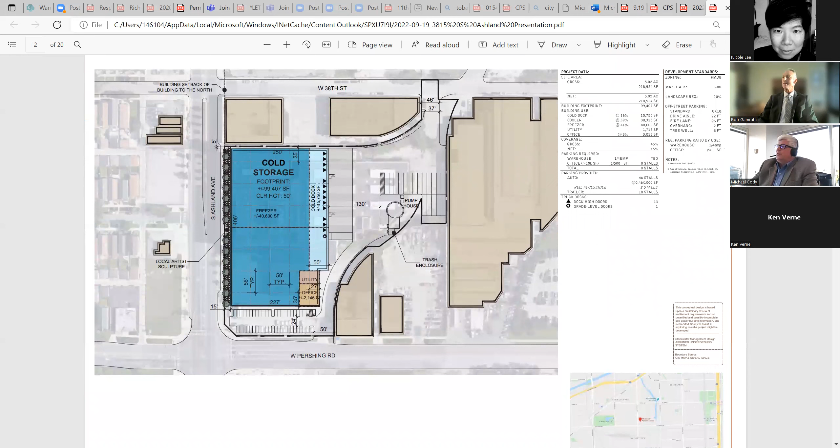So this is where we currently stand. The facility consists of a cold dock, a refrigerated dock, so trucks can provide both shipping and receiving of cold material, whether that's frozen steaks or whatever, which then goes into and out of the freezer or cooler facility. It's designed to be multi-temp, meaning we can control the temperature and create different environments for different users. There's also a small utility portion, since the utilities in a building like this are unique and need a little room, and a very small office component of about 2,100 square feet.

The site will also separate the truck circulation and the car traffic. We've gone to some great lengths to set the building back from Ashland, providing a 15-foot setback. We originally started at a 0 lot line, which is permissible and common for other buildings in the neighborhood, but because of the bus stop and pedestrian traffic on Ashland, we coordinated with the city to provide the 15-foot setback. We're also providing an artist sculpture area to help complement the building. We have some trailer storage at the rear of the site.

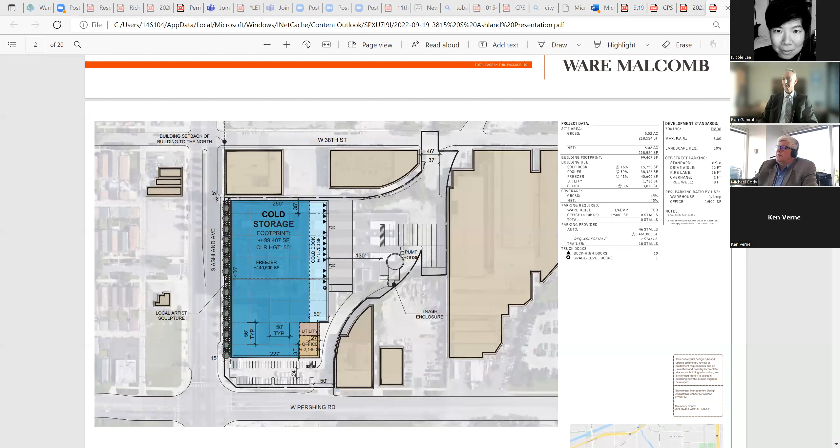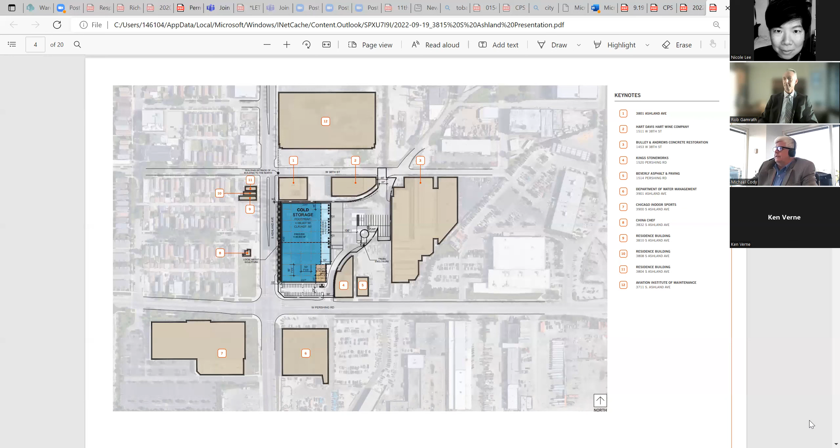If you could advance to the next slide, that would be helpful. We're showing some of the contextual neighbor buildings in context to our site. We highlighted the different facilities here—we can go back to the slide as needed, but we're putting our site in context of the others. The next slide shows the zoning.

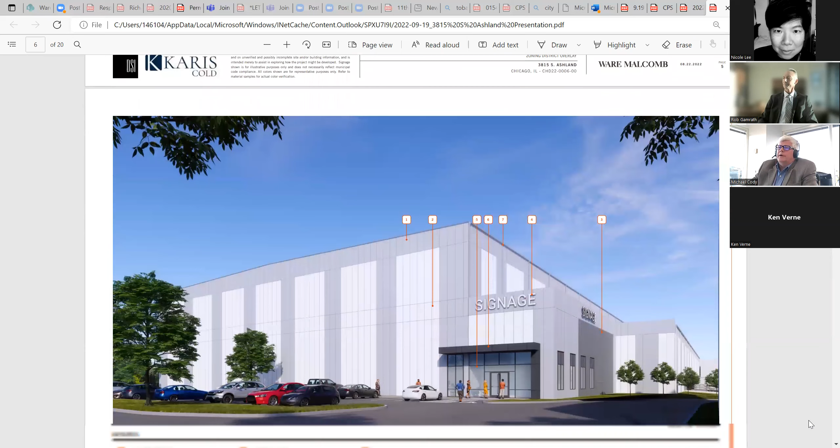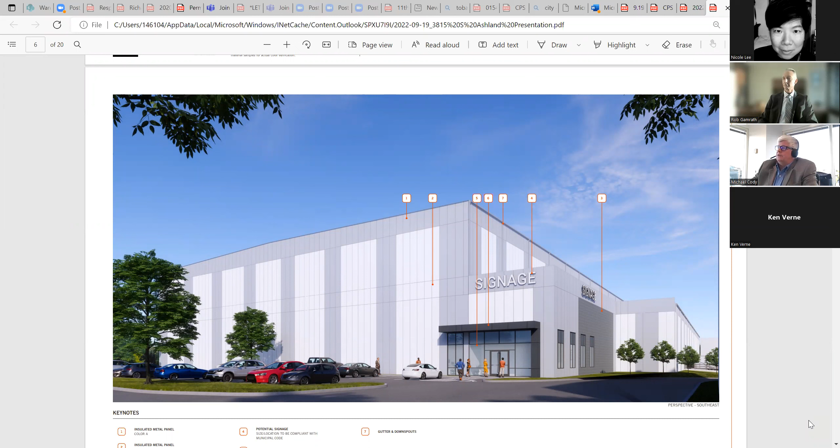And then we start getting into the building architecture. Cold storage facilities require a certain type of material and colorization in order to maintain the warranties. You can imagine the temperature change—you don't want to make a black box, because it would gain all the heat and wouldn't be conducive for the cold environment we're creating inside.

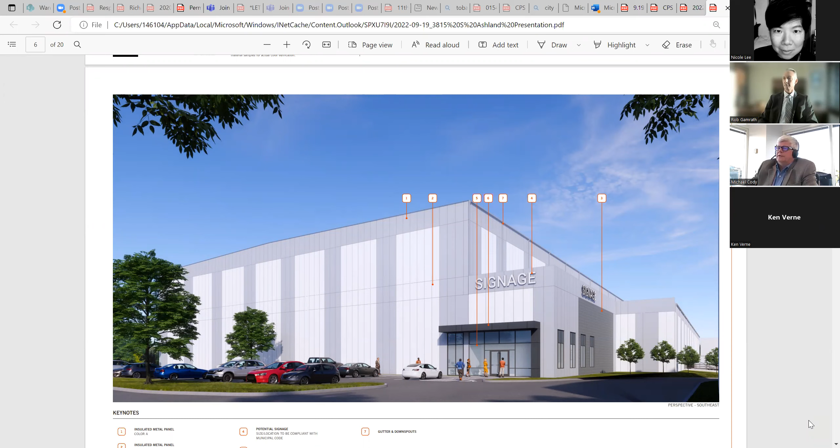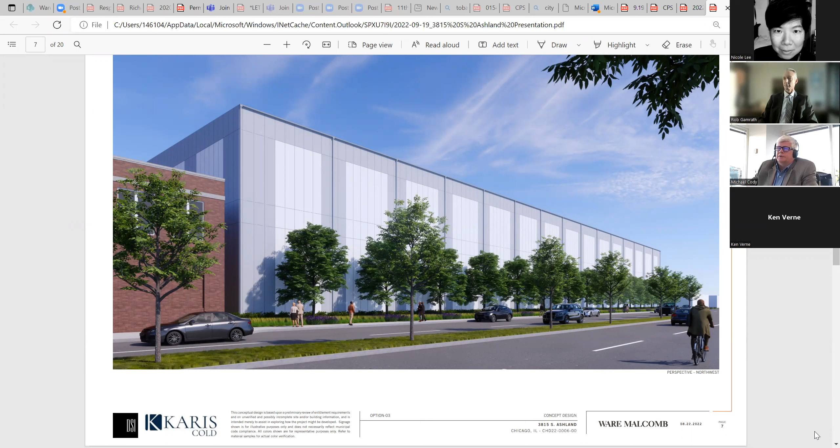If you could advance to the next slide, this is a view showing the office corner, and this is a view along the Ashland Avenue side. We tried to give it some contextual relationship to the neighborhood, tried to break up the long sea of white panels with a little bit of colorization. You can also see the downspouts coming down the side of the building, since those are external when you're in a cold storage environment.

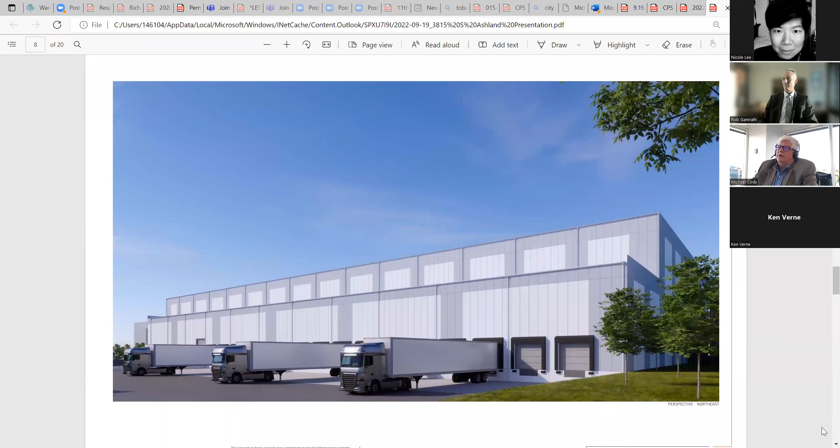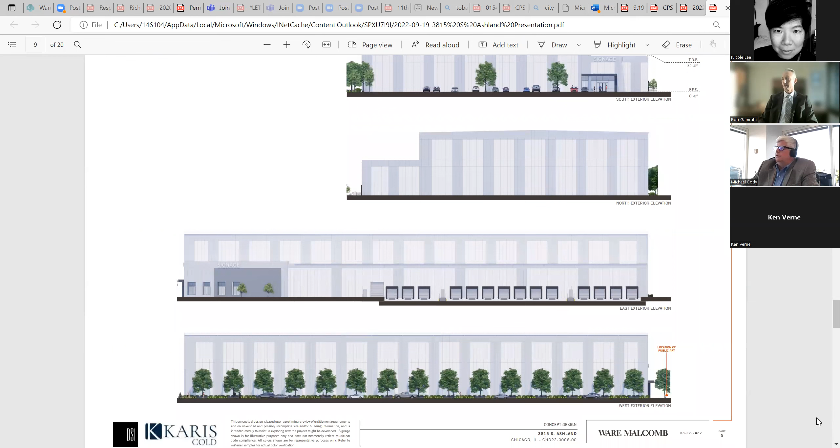Then, if you could go to the next slide—I feel like I'm talking way too much—this is a loading dock view of the building, showing how the trucks would facilitate storage and circulation of goods. Then these are just the flat, boring elevations, but they show the building. I think the renderings do a little more justice to it.

Is that good, Bob? Did I miss anything? Yeah, no, I think that's great.

As Mike pointed out, a lot of thought was given to the orientation of the building, and the most active portions of this facility have been aligned to face other commercial and industrial uses. An effort was made to keep the Ashland Avenue side, still a commercial corridor, more active, while as you progress further west into the neighborhood and residential uses, that activity has been de-emphasized. There will be a lot of landscaping—it will be one of the only buildings with a setback in this corridor, and will be heavily landscaped. These design decisions were made to make this facility an asset to the community and to mitigate impacts that otherwise would have occurred had the truck docks faced Ashland or moved traffic off of Ashland, which have now been mitigated.

We also tried to create a queuing environment for the trucks in the neighborhood. There are a lot of trucks that, hate to say it, queue in the public way, waiting for another truck to finish its circulation. We tried to create that environment within our property lines, which is a more effective tool for mitigating truck traffic in the neighborhood.

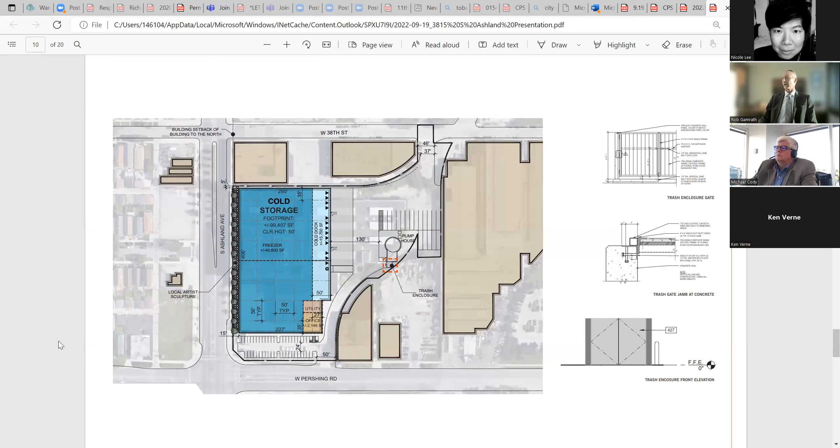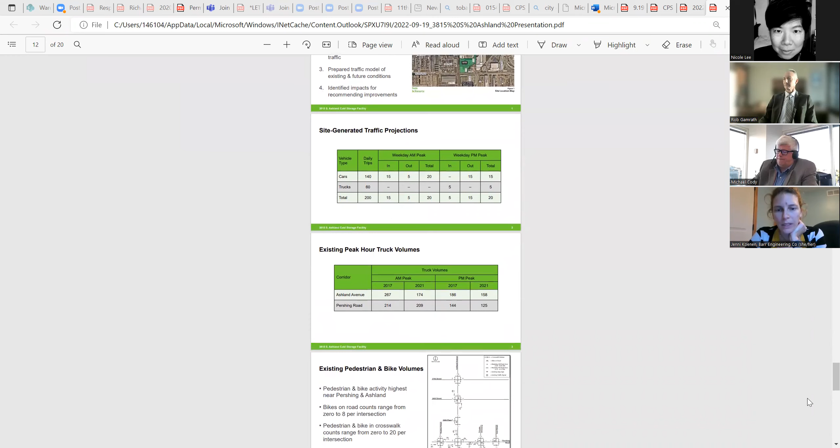Jenny, do you want to transition now to talk at a high level, or refresh folks' recollection on the air quality study that you performed and what you found through your efforts? Yeah, that would be fine. I think my stuff comes after the traffic study in the PDF, so it's probably a couple slides right there where the photo is.

Good evening, everybody. My name is Jenni Koenen. I'm a senior environmental scientist with Barr Engineering Company, and I prepared the air quality modeling report for the project, which involved modeling of 3 different pollutants as required by the new guidance and municipal requirements for projects such as this. We evaluated NOx, PM10, and PM2.5 from both the stationary and mobile sources from this project. The column on the right shows the different pollutants and standards we evaluated, and the project's modeled impacts were below all of the significant impact levels that would dictate a further refined modeling approach for the area.

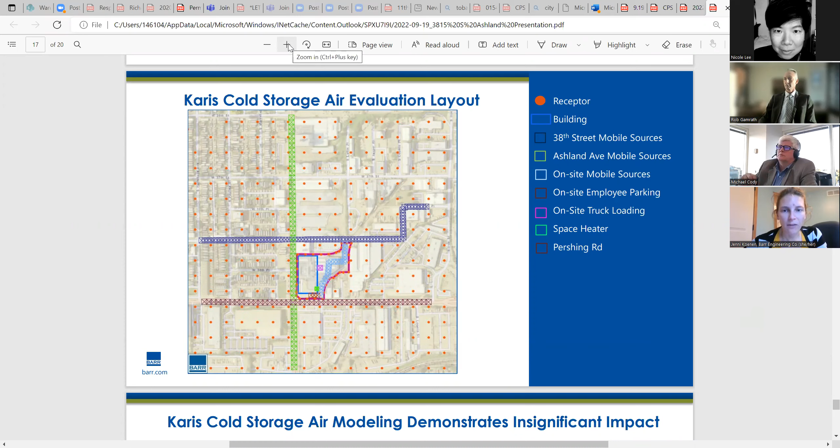If you want to scroll to the next slide, Alderwoman, that'd be great. This is all from the public posted modeling report. This is a figure showing what we modeled for the project. You can see Ashland and Pershing. The facility is outlined in red with the building as a dark blue rectangle oriented north and south. Within the facility fence line, we have 2 stationary sources. One is in green at the southeast corner, which is the space heating component emissions.

To the north of that, the purple box represents the idling emissions for the trucks as they're stationary and unloading their goods, as was shown in one of those earlier figures. We also have the vehicle exhaust emissions from the trucks as they drive through the facility, shown as the light blue periwinkle color. The 3 boxes on the southern end represent the on-site employees when they arrive and leave, which is the parking lot. Outside of the facility are the different roadways that we modeled the project emissions for, based on the traffic study and the likely routes that trucks would take, both trucks loading and unloading, and also employee or general light vehicles traveling along those roads.

The orange dots represent receptors that have X and Y locations, and the model calculates an air concentration at each of those dots. We evaluate all of the impacts for those 3 pollutants at each dot, and the maximum modeled air concentration is compared to the significant impact level standards to determine the project's potential impacts. If you scroll to the next slide, that'd be great.

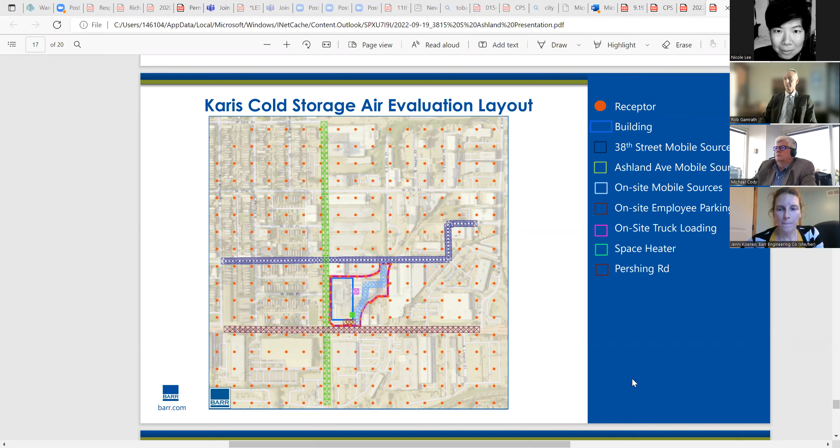The SIL, or significant impact level, is represented as a unit of concentration of a pollutant mass per volume of air. The SIL represents a small fraction of what's called a National Ambient Air Quality Standard, which is the standard that dictates overall human health protection. So the SIL is a fraction of that, and a project that models below that SIL is considered insignificant and unlikely to contribute to any potential air quality violations. The project impacts are next to that SIL column, and you can see that all of the modeled project impacts are less than the SILs for the pollutants evaluated, with the percentage of each to the SIL shown on the far right.

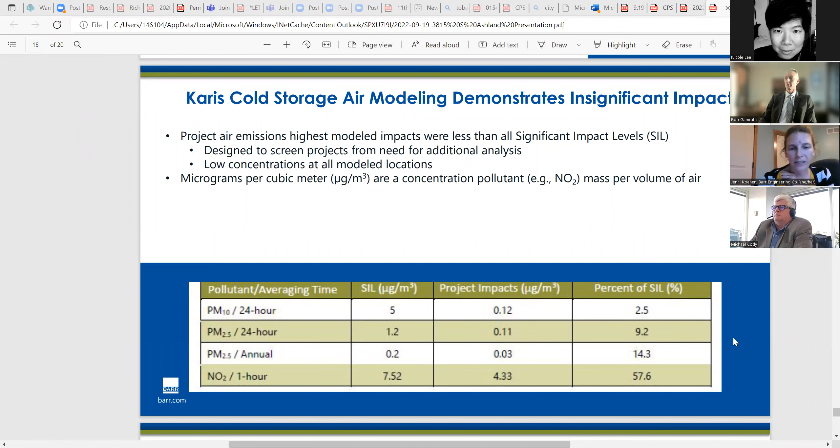I have just a few pictures from the modeling report. Sorry if it's a little hard to make out, but this is from the report, so you can download it and look at it yourself and read through a little more detail of the analysis.

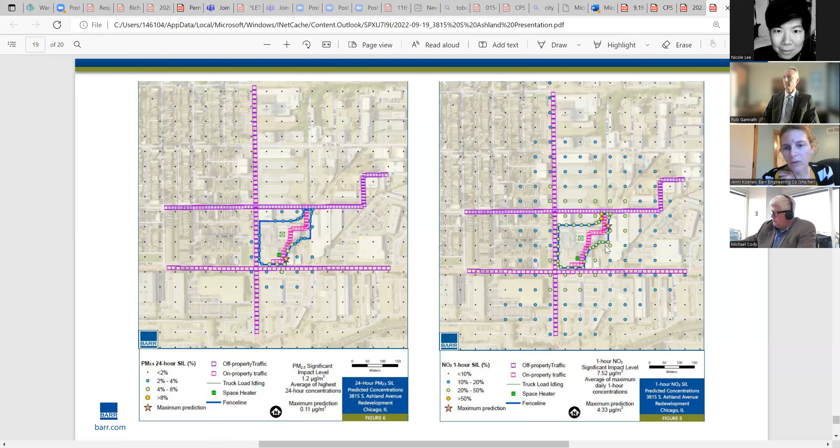So we see that the highest modeled impacts are focused right along that fence line, and the same thing for the 1-hour NO2 SIL. On the right, the maximum impact is along that fence line, and we can see that air concentrations decrease with distance, showing the degradation in air concentration. All of these results shown here are less than the significant impact level as well.

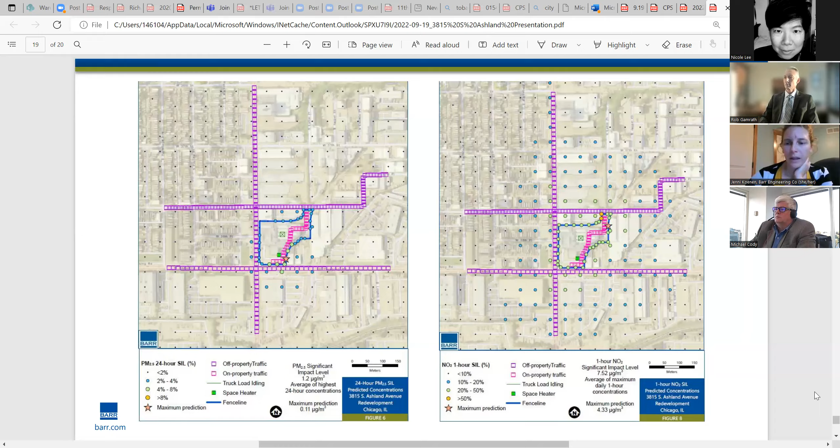To summarize, this evaluation followed the recommended guidance. We used the EPA regulatory model, the most current version, and the most recently available meteorological data representative of this area. We looked at project emissions from space heating, passenger vehicles, and trucks, and modeled them assuming they were operating 24 hours a day.

These results show that the project's impacts are all less than the significant impact levels, and we would expect that the project demonstrates that going forward, it would not have any significant impact on the surrounding air quality for the area.

Thanks, Jenni. I think maybe we'll have Sara summarize the traffic study, and then we can jump into questions. I'm sorry, I took us out of order, so thank you for adjusting. No problem, that's okay, we can roll with it.

Well, I do see some familiar faces, some new faces. I gave a brief summary of what our traffic study included and what it concluded last time, but I'll again give a brief update so that everybody's up to speed, since there are many lucky people on this call who don't have to read traffic impact studies all the time.

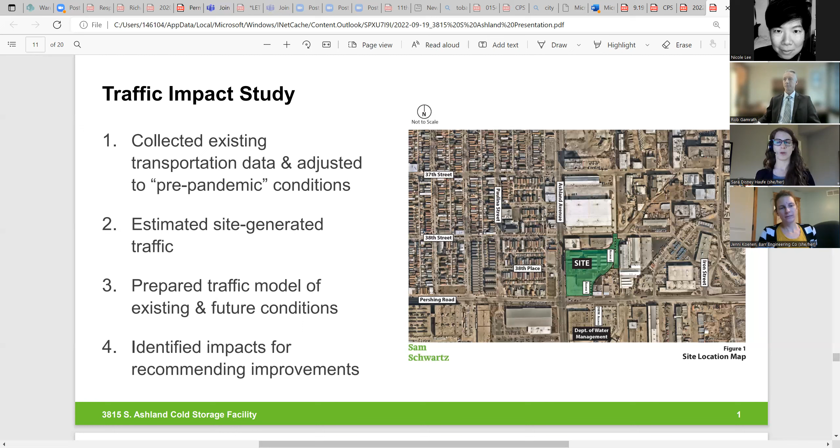To give a brief summary of how much traffic is projected to be generated by this proposed development, we used a national reference manual that looks at different industrial uses that offer similar types of operations to this proposed cold storage warehouse across the country. It's a standard industry resource for traffic engineers, and we used it to look at the square footage of this development and how much traffic it may generate as a result.

So in summary, what we would expect on a daily basis from a development of this size is roughly 200 trips per day, and a trip is defined as either an inbound or an outbound movement. 140 of those trips would be cars, and then 60 of them would be trucks. Trucks includes both smaller box trucks and larger semi trucks, depending on what the tenant uses to conduct their operation.

We specifically focus on the morning and evening peak hours, which align with rush hours of traffic on the adjacent streets. This allows us to look at the highest period of traffic already on Ashland and Pershing, then add traffic from this development on top to get a critical hour. Here you can see roughly 20 total trips generated by this development during those peak hours. For context, daily traffic on Ashland is about 21,000 trips, and on Pershing it's about 16,500 trips.

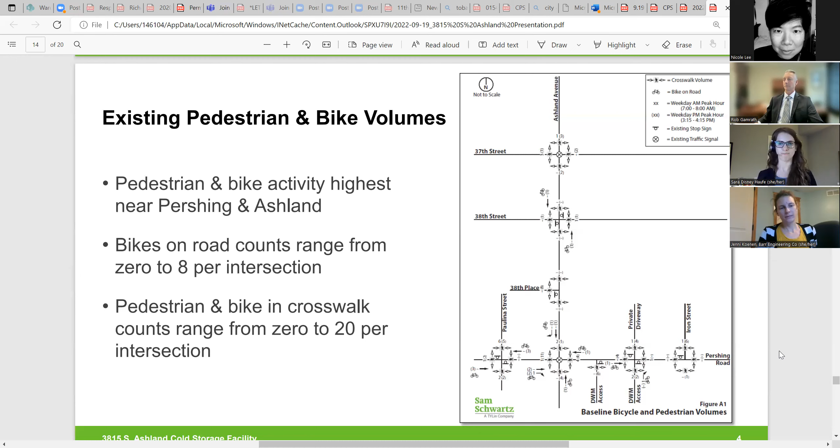The bikes counted riding on the street ranged from 0 to 8 bikes in total for any given intersection shown on this figure. For the combined pedestrian and bike volume in crosswalks, the range was between 0 and 20 pedestrians and bikes in total per intersection. In both cases, the highest end of the range was at Ashland and Pershing, where we saw the most activity.

Our conclusions identified that the site traffic would account for a small percentage of the traffic on adjacent streets, ranging between 0.2 and 0.3% of the traffic on Ashland and Pershing. But we did identify opportunities to increase safety at these access points and therefore on the external streets near them, specifically by prohibiting inbound left turns into the access on Pershing Road. That access is very close to the signal at Pershing and Ashland, and there are a lot of lanes to cross and a lot of driveways in that area.

It's our opinion it would simply be safer if employees and truck drivers were informed in advance to direct themselves up to 38th Place instead and use that access too. To facilitate that, we recommend trucks and cars be able to utilize both accesses so that they can function properly despite the left turn restriction we recommend. These recommendations were part of the study submitted to CDOT and went through their review prior to them giving us the okay to post it on the city website and come to this meeting.

So I'd be happy to answer any additional questions that may come up. And back to you, Rob.

Thanks, Sara. So Alderwoman Lee, I think that gives everybody a good refresher on the project and the reports. I know there were a couple of items that came up in the last meeting that we either said we'd come back and address in more detail, or ran out of time to address. One of those was a question about sustainability and some of the sustainable features. Mike, if you could spend just a minute on that - I know you went back and looked at it, and had previously shared the city's sustainability matrix, but if you can provide a little more color to that.